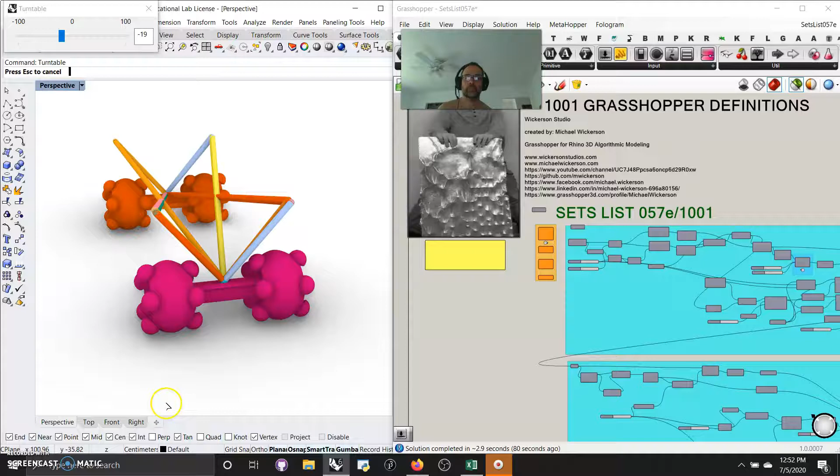Welcome. Let's continue with the sets list. I'm basically using list items to keep building this form. And as you can see, it's a pretty parametric model.

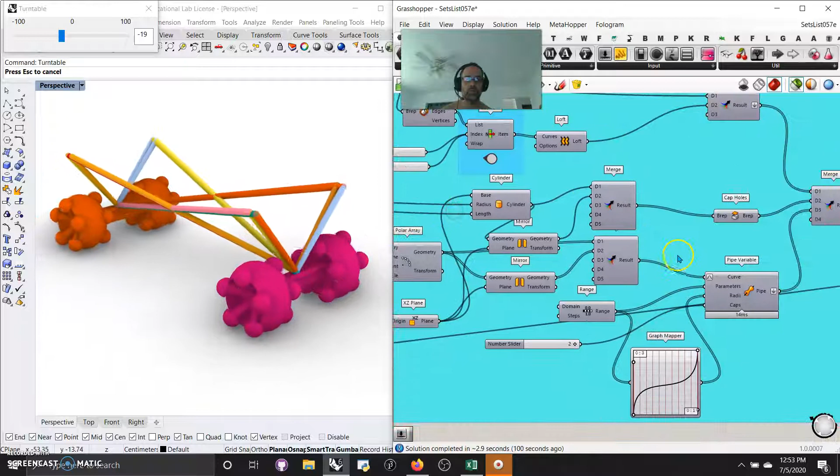It starts with what I did in the last one, playing with some curves and NURBS curves and lofting them, and building the geometries of the wheels that are fully parametric to a Bezier curve, which directs the shape of these spokes. I ended up with breps of the wheels.

What I did was I then went and took the breps of the wheels and threw them in to evaluate them and do an extrusion off of what was planar, which happened to be this very cool shape that could be extruded into this area here.

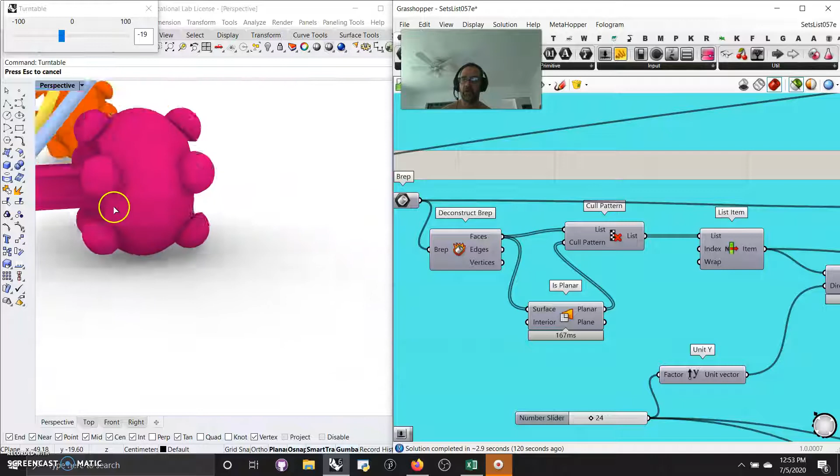If I could hold it still, it does a nice extrusion here, and then I mirrored it and oriented that onto a rectangle of points in the corners, which wasn't too hard. Could have brought it farther in.

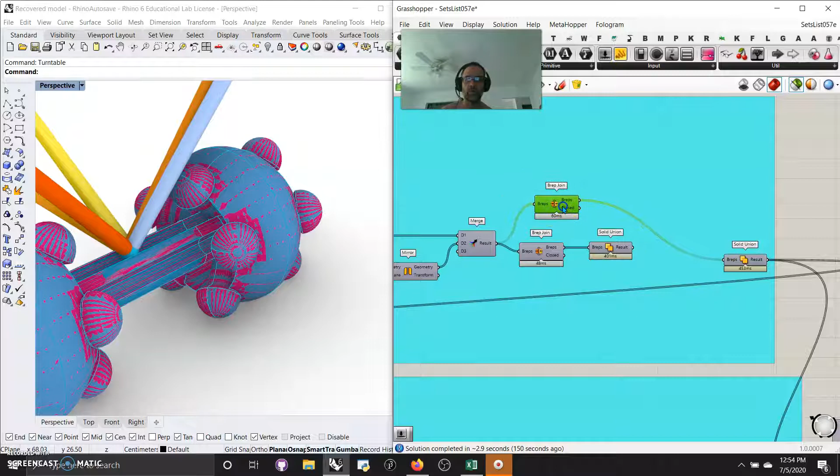I do have a double item here, which I'm not sure why I have that. Let me go back. This one goes nowhere. This is the one that actually was in use. Didn't do a solid union afterwards. It's interesting—maybe that's a bit of the data, that I have two breps as opposed to unioning them. Anyway, I'll have to look into that one.

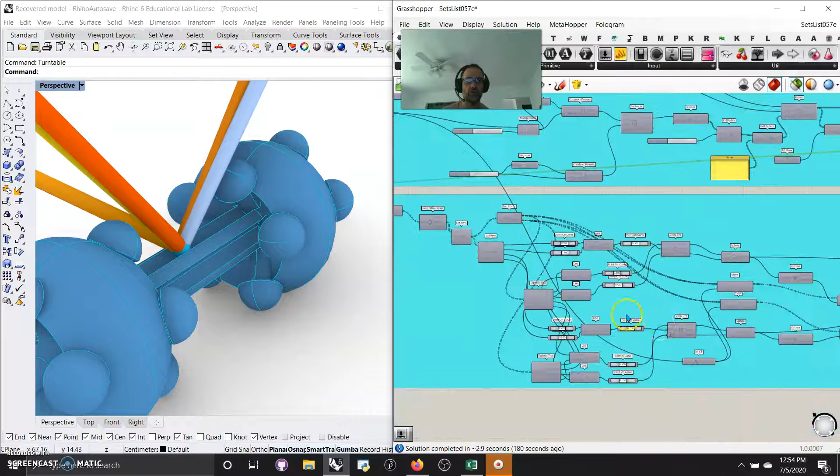That builds a very interesting shape here. And then what I did was I went and took apart that piece again and called out what was planar again, and was left with these little curves that I was able to find the sphere in the center, and set my two spheres on this end and on this end.

And then from those points, I was able to loft and do a little bit of maneuvering and a holistic cross-reference to build this interesting frame, which goes into a nice pipe. And you're done—it wasn't too hard.

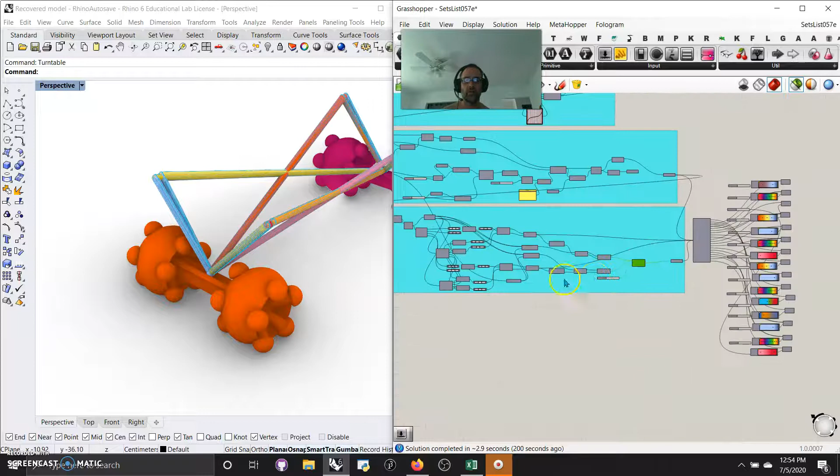And then I threw them all into these different colors. It's a nice little script. I will be putting it up on GitHub. I find this way interesting.

I'm going to build a kind of vessel-like form, like a basketry on top, which would be the next stage of this. But basically, just keep running your scripts.

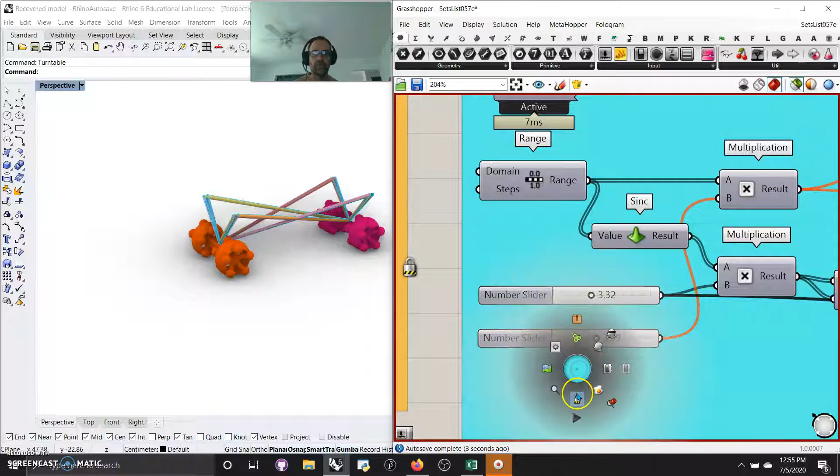So if you change anything in your scripts—if I went in here to the solver, I'm not sure what's going to happen here, turn the solver off, I'm going to bring it down to about half. I'm sure that's just going to transform the shape of it as I put the solver back on.

Take a few seconds to load—and we ran out of something. So yeah, I obviously pushed it away from what it could actually handle. Put the solver back on and let's put it up this way and see if the solver works.

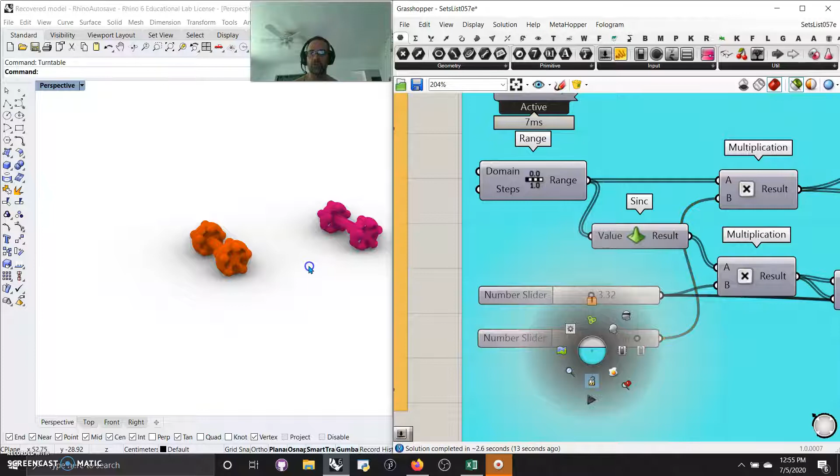So I'm just kind of working parametrically to see if I can still hold some geometries. And there it is, it's back again with little subtle changes to it. Hard to see exactly what happened in the multiplication.

That was one that was playing with the range. Always make sure you take your solver off. Obviously the count here is not going to be a major issue. If I wanted 3 count, I could put that back on.

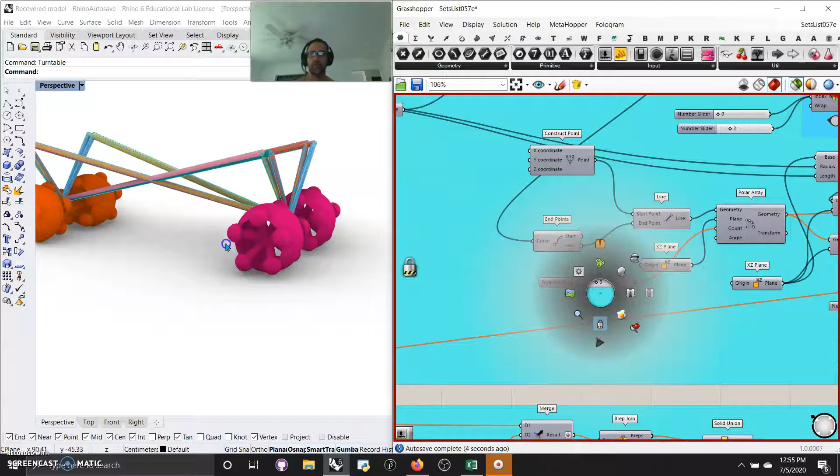That's going to change the spokes. Give it about 3 seconds to load. And there you go—you got a different result, but that does affect the geometries here and has a little bit of effect on how this reads.

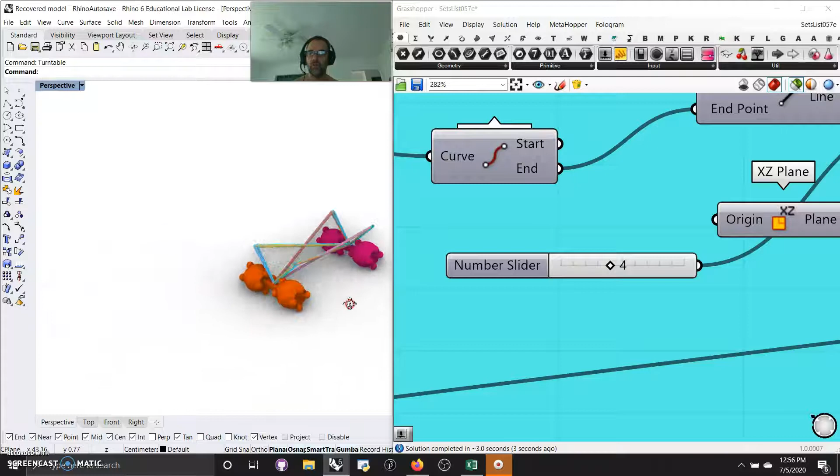So I'm probably going to have to keep to—I'm just guessing, I'll put it back up to 4 since it was working at 5 or 6. Let's see, it works well on that. It might be working on even or odd numbers. So we'll just have to keep playing with that.

At any time you want to go in, the Bezier curve is kind of interesting to play with because that changes the shape of this, but it also alters how the spokes read because that cuts the shape in here differently. So the radii of these pipes change accordingly—everything does have an effect on one another.

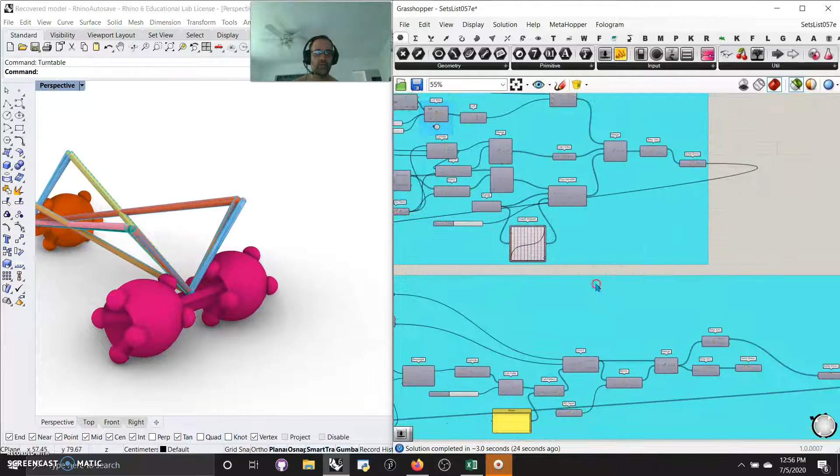And I just keep writing these other script sections as I go. Obviously, that's moving in the y or x axis. So if I brought that down, maybe that would separate the pipes and make for a different thing.

But basically, you play with it a little bit, and that pushes that down through these spheres, which I probably don't want because that would lock the wheels. But you can see a kind of change in that as well.

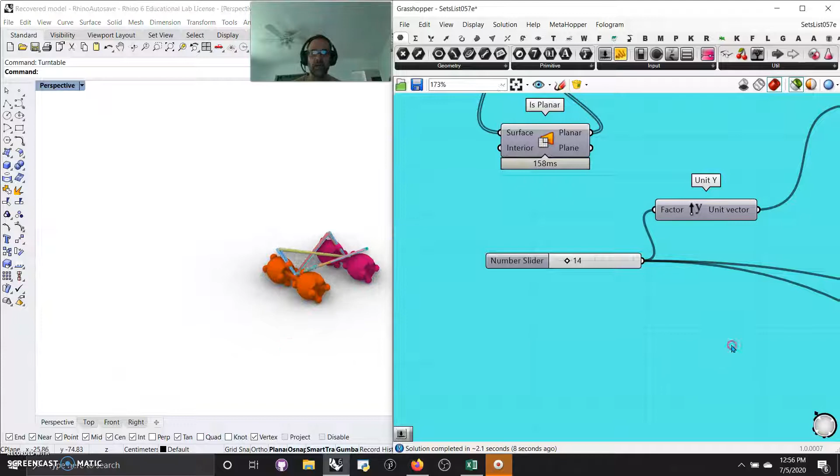I just continue to do this as I go—a multiplication, take off the solver. Let's put it to a 3. You can put it to rational numbers, but that's how you kind of play with it and do some alteration on it. Domains, ranges, anything that's got a little bit of a curve to it.

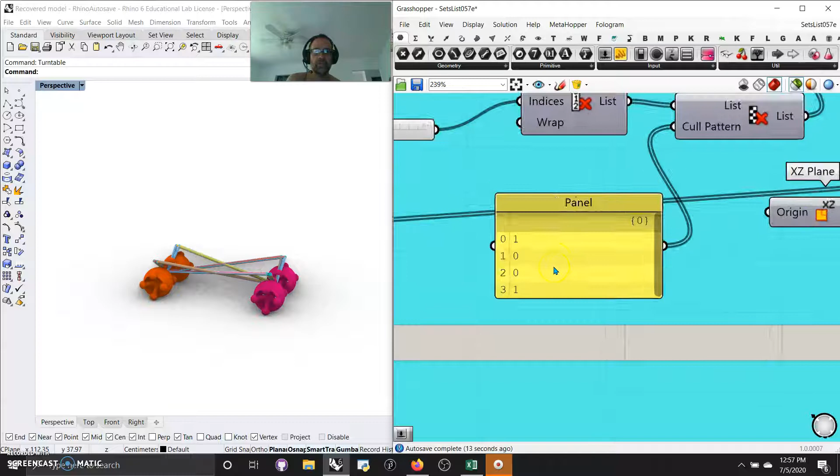A culling pattern is kind of interesting because that's how I went in and actually figured out what objects I wanted to mirror, instead of making them all and worrying about reversed planes and having to flip planes and all that. I thought it would be best just to mirror in the end.

But I do like this 'is planar' to locate some cool tools. I was actually using the 'is planar' so I could cull patterns so I could fill at edges, and I may go in and do that afterwards.

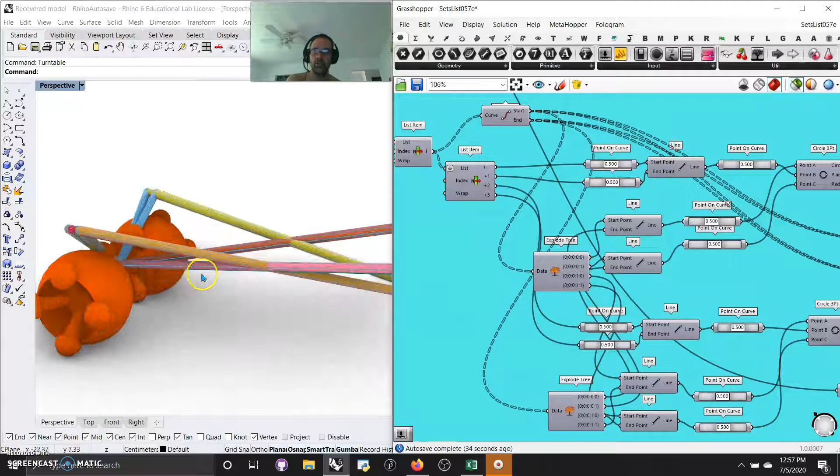But I'm not too—I'm not disliking this too much. I should probably hold that one back. And then I have a lot of points on curve in the middle, and that's maybe an inefficient way to work, but I do like to keep my data understandable in the end.

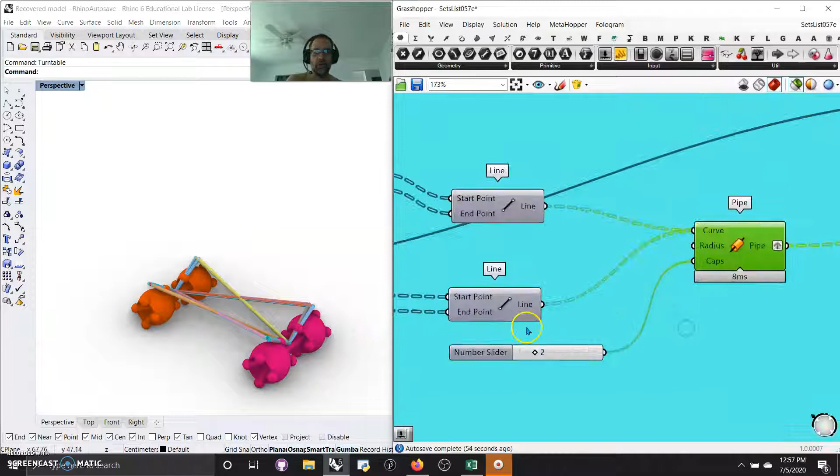Like here in the end, I released 16 pieces of pipe, which can all have their radii changed. If I went in here and put the radii down a little bit—actually it's set at 1, so let's take the solver off, go to 1.00, and bring that down as a radius, and you'll see how the pipes act a little different.

There they go, and we've got double pipes in there, so we could even take that lower. It's going to slow the script down as I go, but you see what's happening—this really weird little pipe that's happening.

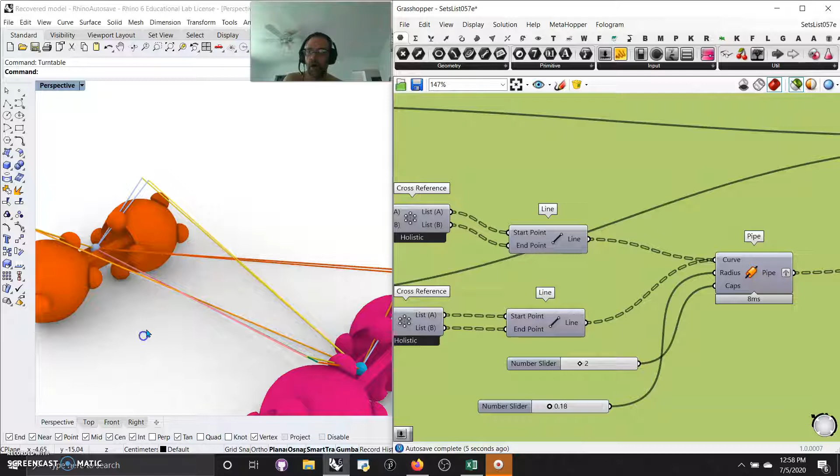So anyway, I think in line and point, and I'm playful with these scripts. Not sure where it's going to go. I'll keep putting these scripts up online, and I'll keep generating more and more objects. Thanks for watching.